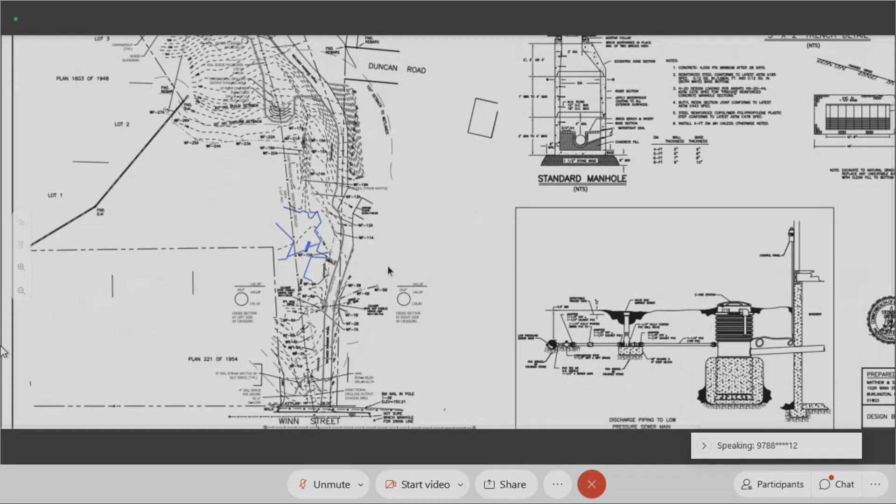As part of that, we did raise the infiltration system a foot. I went back and looked at some test holes we had done for the septic system, and in one corner of that system, there was bedrock. It's not a groundwater issue, but we raised it to have a 2-foot clearance above the bedrock.

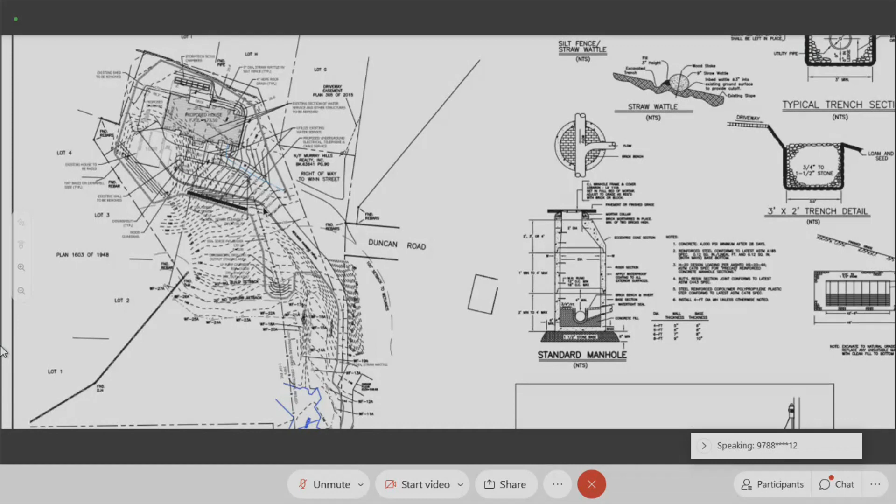We added a drainage trench at the toe of the slope along the driveway. I'm not sure that came up specifically, but it seemed like it was in order once we had the discussion, at one section where there's a pretty good slope coming off the driveway to get a little bit of infiltration. Even though it's far from the wetlands, it still seemed appropriate.

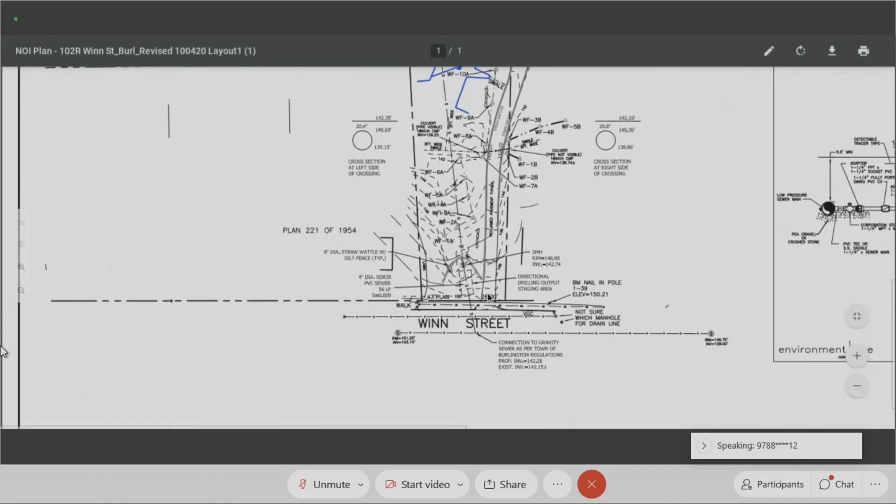We have moved the sewer manhole closer toward Winn Street in order to avoid the 20-foot no disturb zone. The manhole was always going to be outside of it, but they need a little bit of room there, so that was not a big deal.

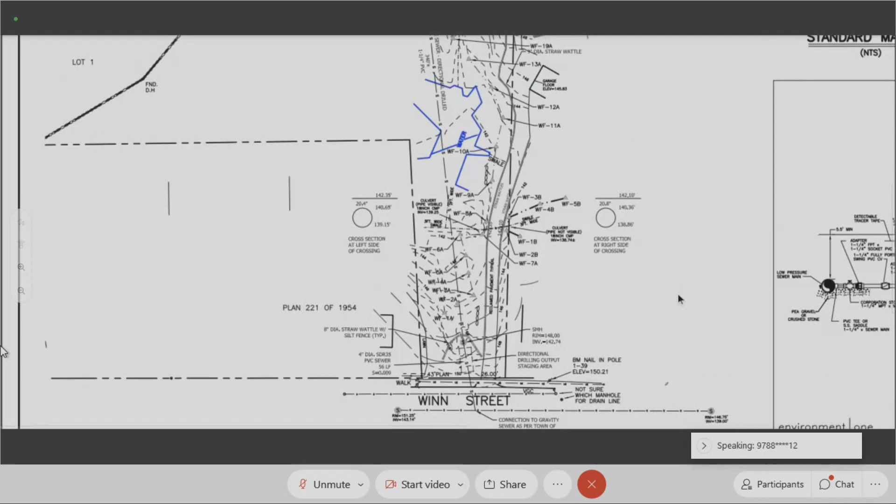We have reduced the slope on the southerly side of the home. It was pointed out there was a pretty significant slope there. As I looked into it, it was a fill, not a cut. So it just seems like to lessen that and either have some foundation exposure or build a knee wall on that side seemed more appropriate than bringing in all that fill.

We have revised the plan to show hay bales at the slopes downhill of the construction, and we provided wattles along the driveway, which were one of the comments.

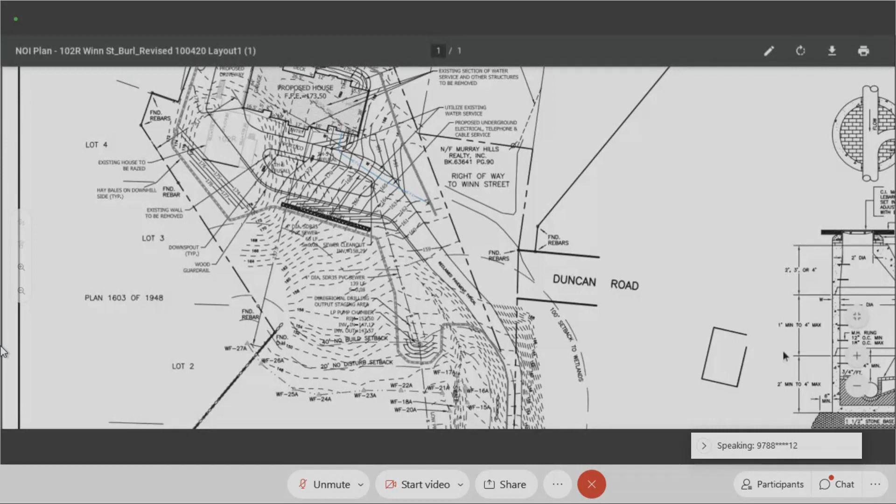One of the outstanding things is we had discussed the crossing of the corrugated metal pipe. I think it will be okay. I did find some charts that say 12 inches of cover would be all that was necessary, and there is a little bit over 20 inches. So I added a cross section on the plan to show that.

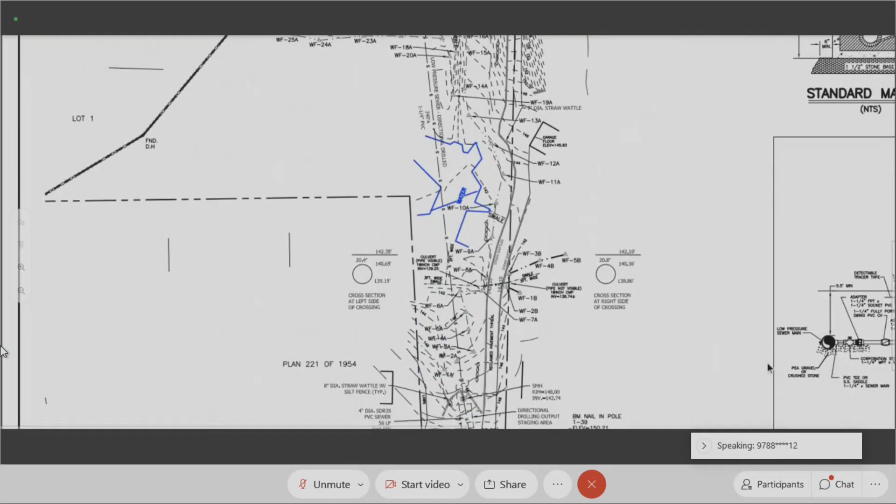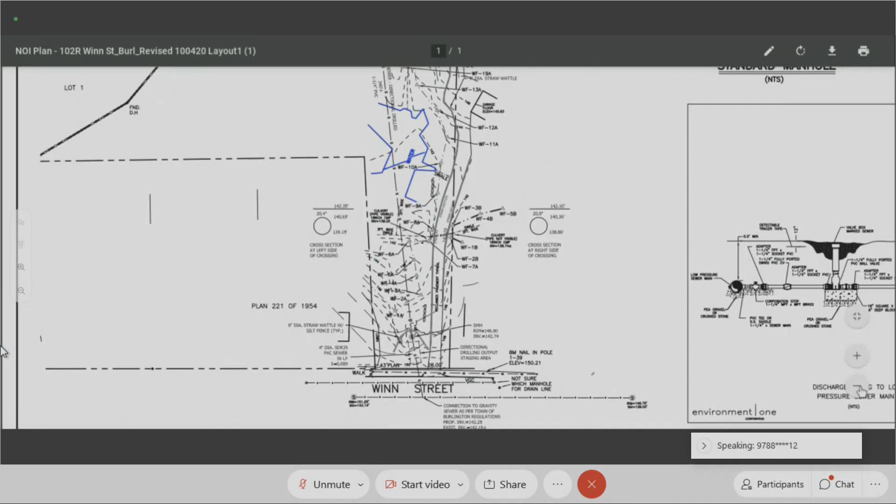Mr. Lee has hired a structural engineer who can provide a letter saying that's okay. And we were asked to reach out to the abutter to see if we could provide access from Duncan Road, but we were unable to make contact with him. We have no problem if the commission would condition that we continue to try, and if we're not able to provide that access, then we need to provide a letter from a structural engineer that we need access from Winn Street. So that's about it.

Any questions? Be glad to answer them. Mr. Lee is here as well.

Okay, very good. Thank you, Mr. Dresser. John or Eileen, do you have some comments? Specifically, do we need anything more from this applicant? And if you have any comments on the changes to the plan.

So I think the applicant provided all the information the commission requested. I don't think we need more information. Just logistically, though, we had prepared a draft for this meeting, and I guess I need to ask Don if he had gotten a chance to watch the last meeting on cable, because we have 3 members out, and I'm not sure we have enough people to vote on this.

So Don, did you get a chance to watch this? That would meet the Mullins rule requirement? Actually, I did not get a chance. Okay. So with 3 members out who were at that meeting, we only have 3 members who were at the last public hearing for this, Larry.

All right, so does that mean by necessity we have to continue it? Unless somebody else shows up. I know Jennifer had an issue that came up, and I knew that Ed did. I didn't know that Indra wasn't going to be here, so, but yes, I think.

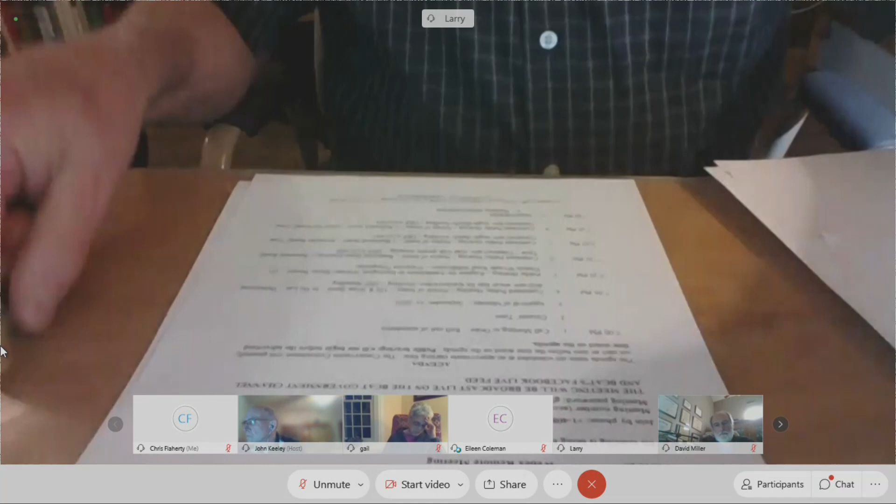When did you send it? I got the script. Is this 108 Muller? No, this is not 108 Muller. This is 101 Francis Wyman.

I do not see it, Eileen. At least, I don't think so. All right. Eileen, you're not on mute. Oh, I am on mute.

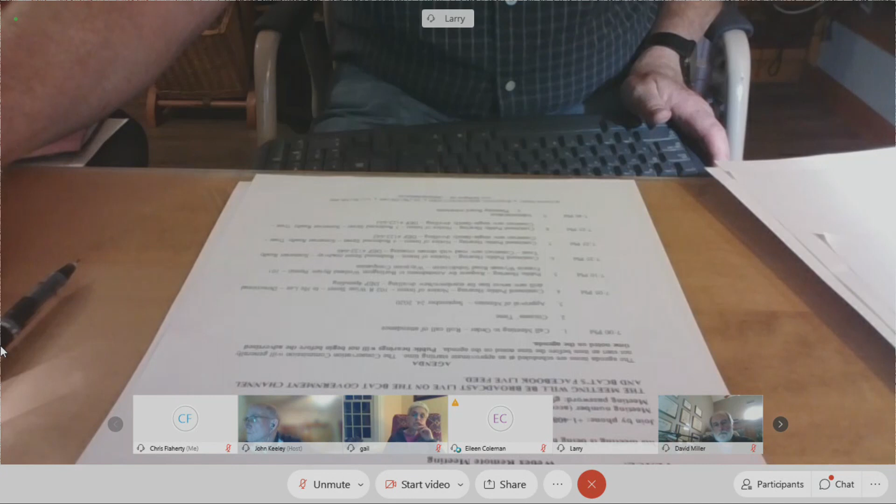Sorry, thank you. I was just saying, John, do you have access to it? Because the Chromebook is being slow, I'm trying to look at my email. Access to it where? I'm at home, so I don't have access to the G drive. All right, so, all right.

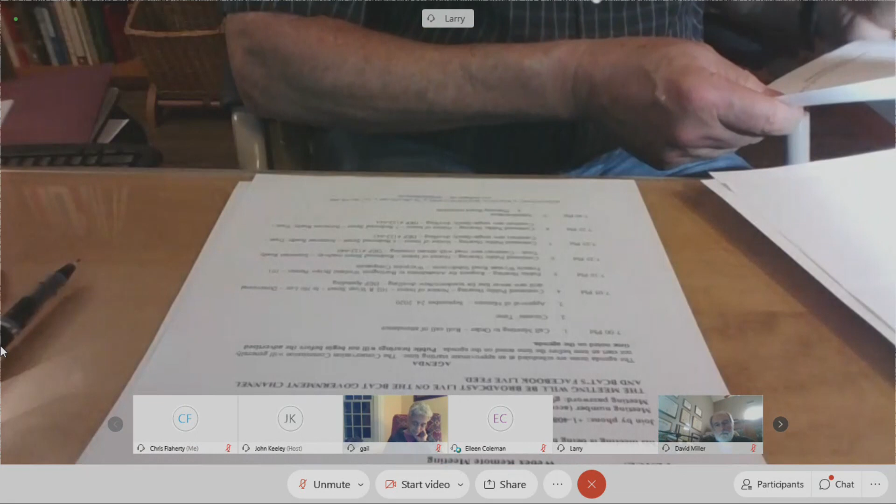Okay, notice is given that the Town of Burlington Conservation Commission will hold an amendment to an existing order of condition for 101 Francis Wyman Road. This was for the construction of a 6-lot residential subdivision with 2 cul-de-sacs located at 101 Francis Wyman Road. We'll take all information related to the amendment and will thereafter decide whether or not to affirmatively issue an amendment to the existing order of conditions.

The original subdivision plan was approved on September 17th. Anyone that has comments they would like to submit in writing can submit them to conservation@burlington.org.

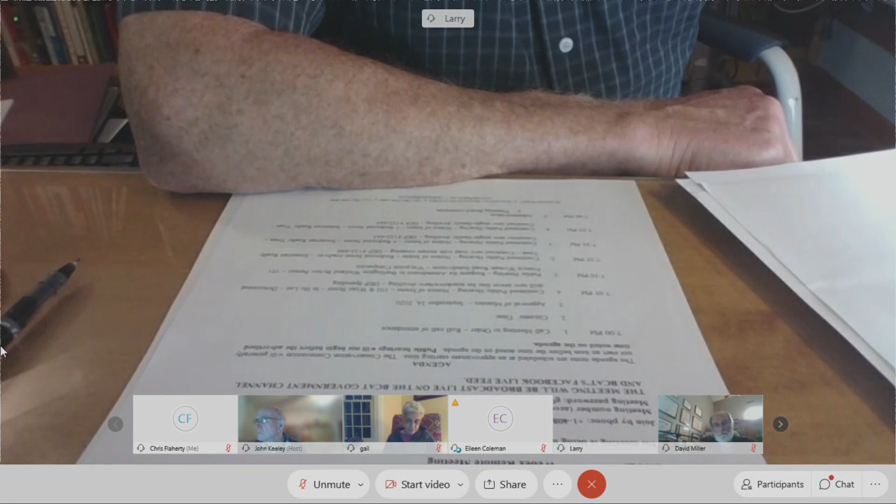All right, so we have officially opened the amendment. Who is here for that agenda item? I am, sir. Ed Champy, Waypoint Development, also the owner of General Walker Estates. All right, so you're welcome to say what you would like to say. The floor is yours, sir.

Okay, just to explain a little bit, this has been going on for some time, and I'll try and give a little background to explain why we're here today. Originally, this was approved prior to us acquiring the property as a cul-de-sac at Dartmouth Road, and then at 101 Francis Wyman, a second cul-de-sac was approved in order to get enough frontage for a two-house subdivision cul-de-sac off of Francis Wyman.

The planning board had suggested that the zoning board of appeals be sought for relief to allow removal of the cul-de-sac, leaving 75 feet of frontage, which is insufficient in that location. The relief was granted, again prior to us acquiring the site. Since then, we've gone back and edited the plan, with Steve Dresser as the engineer, and removed the cul-de-sac itself.

And we went back to the planning board. Not only did we remove the cul-de-sac, but because we removed a significant amount of impervious material, we're able to reduce the size of the stormwater infiltration systems. The original one was taking the cul-de-sac plus the impervious area around the dwellings and infiltrating the stormwater. The current system now only has two driveways.

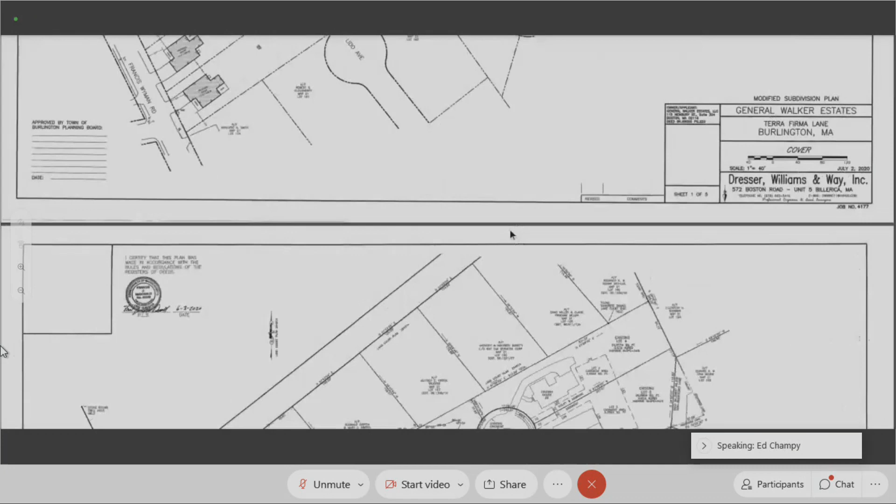There's no longer a cul-de-sac, so it's been removed, and it went back to the planning board. The planning board then requested, originally when it went to the planning board, that the houses were closer to the road than the planning board would have liked, so they asked that we push the houses back. That happened and took place in September, and it was approved by the planning board.

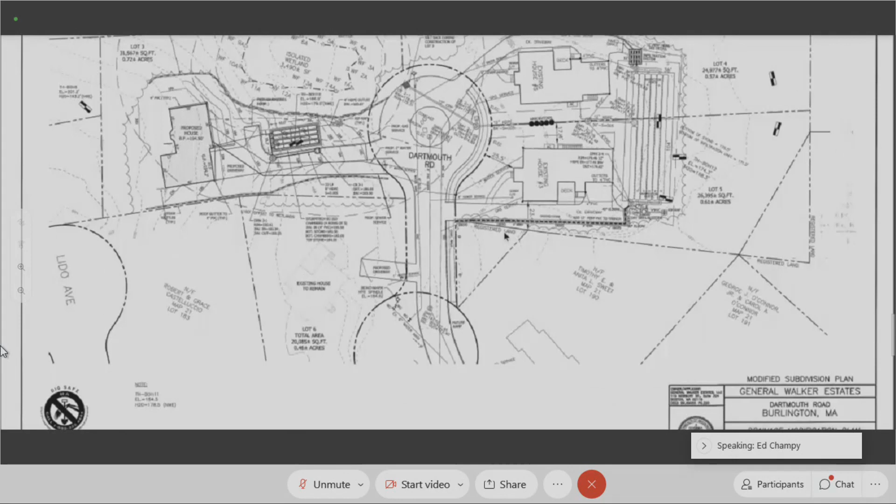So now what we have is two houses with separate driveways to each. In the rear of the houses, there are the stormwater infiltration systems, independent of each other. It's a new plan with less impervious area, and this is the direction that was given based on the ZBA approvals, and now it follows all the requirements.

Okay, Eileen, is this the plan that we're talking about here, that was being shown? You're muted, Eileen. Sorry, okay, yes, I was just trying to show the plan as he was speaking. This is the two homes that are now closer to the frontage than they were before, and each has an individual infiltrator.

All right, so let's, John or Eileen, do you have, or both of you, do you have comments on this amendment? I'm sorry, that's me, I just realized I think I wasn't sharing the plan just there, I was just talking to myself. Do I have comments? I think it's an improvement in that there's actually less impervious area now.

There's less driveway, they're closer to the road, and I think it makes sense to have two separate infiltrators rather than having to deal with figuring out who's going to do the monitoring and management of one between two houses. So I think I have no issue with it, I think it makes sense.

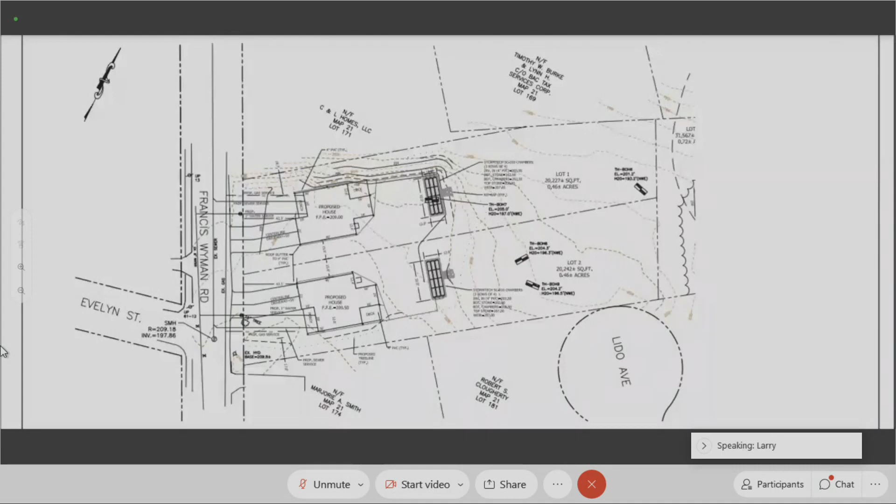Can you see it? Not yet. Whoa, wait a minute, it's coming up. That is the plan. All right.

Okay, so we're talking about the two frontage lots on Francis Wyman. All right. So let's see if there's questions or comments. Gail, do you have any questions or comments?

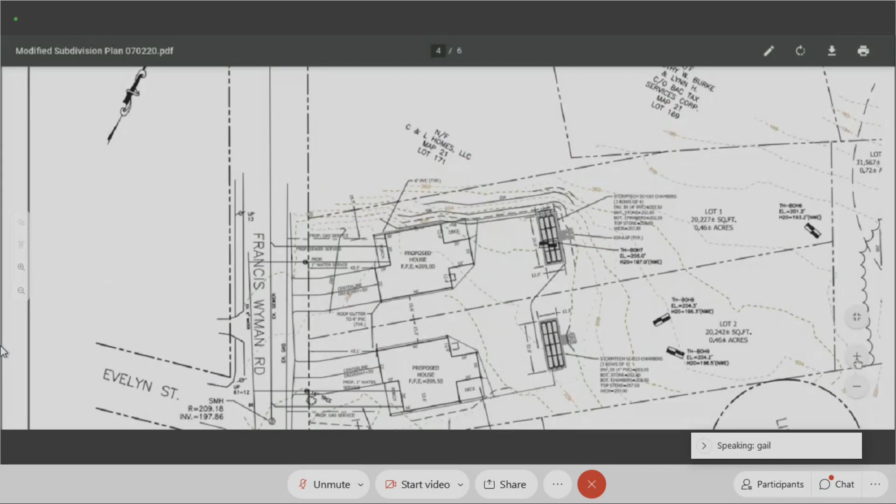No, I can't see the plan that well in terms of the grades and things like that, but based on what was said, there's less impervious area, and having the two separate StormTech chambers seems to be adequate there.

Okay. All right. Dawn, do you have any comments on this one? Not at this time, no. All right, Bill. I think it's an improvement.

My only question is, what is happening to the driveway runoff? It's hard to judge which way it's flowing from the drawing. The infiltrators are only for rooftop.

They are, I can, Steve Dresser was on this call earlier, but he's not here now. I believe, and I'll have to ask Steve, it may fall under the fact that we have less impervious than the original home, and I'm not sure which way the runoff's going. I'd have to ask Steve. But I do know that we have less impervious than the prior.

Okay. Okay. All right. Anything else, Bill? No.

So my question is, from the point of view of the neighbors on each side, will they see this, or should they see this as an improvement?

Mr. Chair, are you addressing that question to me? I think so, because you're the only one here to represent this project. Yes, I apologize, I didn't know if there was a neighbor on the call.

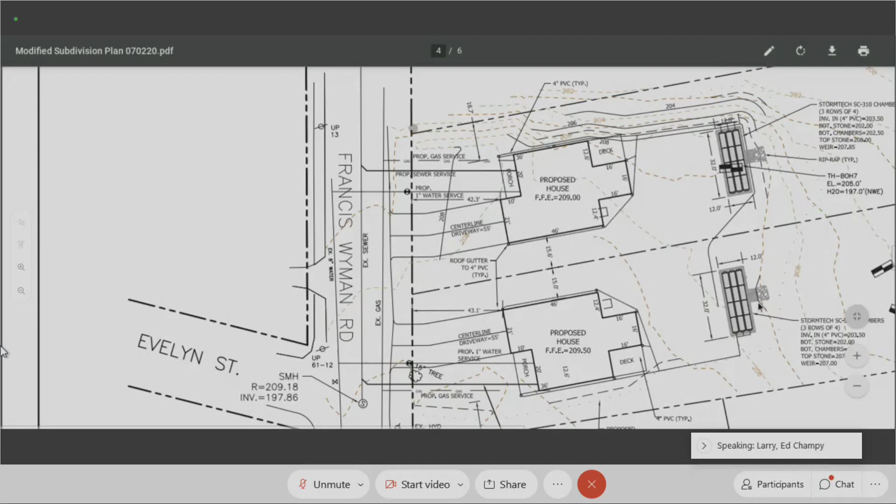Mr. Chair, I apologize for interrupting. I had texted Steve Dresser to find out about the driveways, and he said it's going back to the road. It does that now, so it's okay. It's within the guidelines, so it's going onto the road because it does so now. Correct, there's a large impervious driveway currently in front of the existing structure.

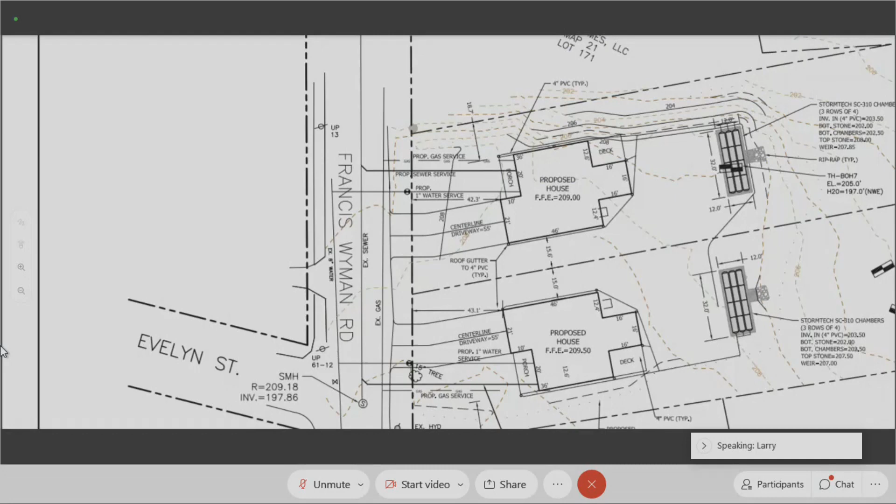John, is that how it's normally handled? That if a driveway discharges into the road with a total tear down, nothing has to be done for mitigation or pitching the crown of the driveway? No, we try to improve the situation. I think there's stone trenches on the edge of the driveways on Dartmouth. I think we'd recommend something like that on these driveways as well.

Okay, so trenches and possibly a swale. And if there's going to be stone trenches, should we have spot grades? I'm wondering, so that you actually get the water going to where the trench is, so whoever does it knows that it's supposed to be pitched that way. Sure. So stone trench, spot grades on the driveway, and possibly a swale, depending on what Mr. Dresser has to say.

Okay, is there anything else? Is there anyone in the audience for 101 Francis Wyman Road who would like to comment on these changes, or on the entire project since it's on the agenda? Nope, I guess the record should show that no one volunteered to make a comment. So because we're doing this by remote participation and the rules provide that we will not close tonight, Mr. Champy, I would anticipate, unless I hear otherwise from our staff, that we would close on October 22nd.

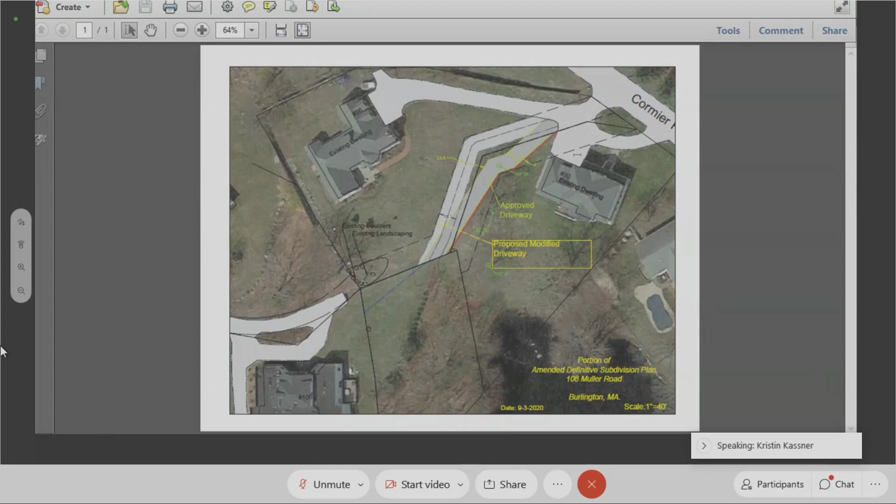Kristin, can I, or can you share the other driveway drawing that we have? Sure, I'll stop sharing. Okay, I'll see if I can just get this on. Well, I'll tell you that I do have a copy of the original plan, and it does say that it is a porous asphalt driveway.

Mr. Chairman? Yes. Neil Russell, 26 Cormier Road. We are the direct abutter to the property. Quick comment, Alan Nelson was here about two weeks ago surveying the property. I believe he intends to provide a new plot plan because the slope is going to be changed, affecting the drainage. I can't comment on that, but I believe an updated plan is supposed to be presented to the Conservation Commission in the near future.

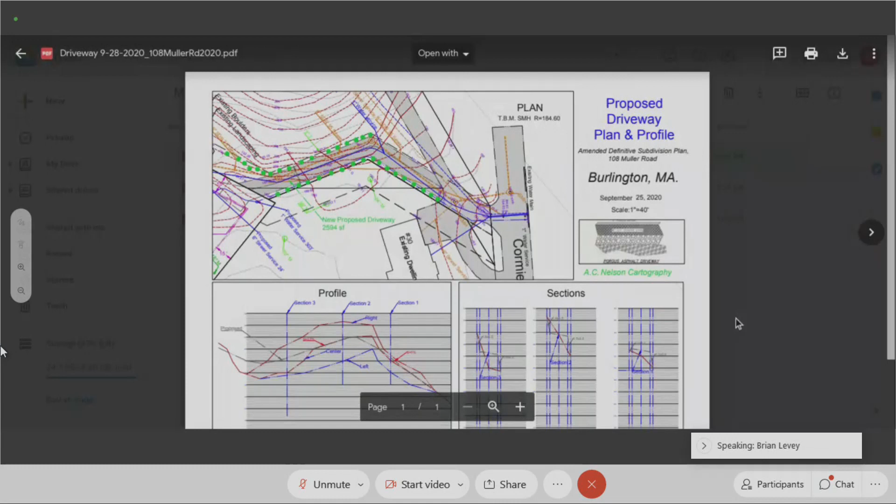Yeah, Mr. Chairman, there's a full package of drainage plans and calculations that have been uploaded to Viewpoint. I can't answer your specific question about whether there is stone along the side of the driveway, but I know I've discussed the drainage with Alan, and he's told me it's more than adequate. But in any event, if we're able to get approval from planning, we will be before you, and we will have to bear our burden of proof before you.

Right, right. This is only comment to the planning board.

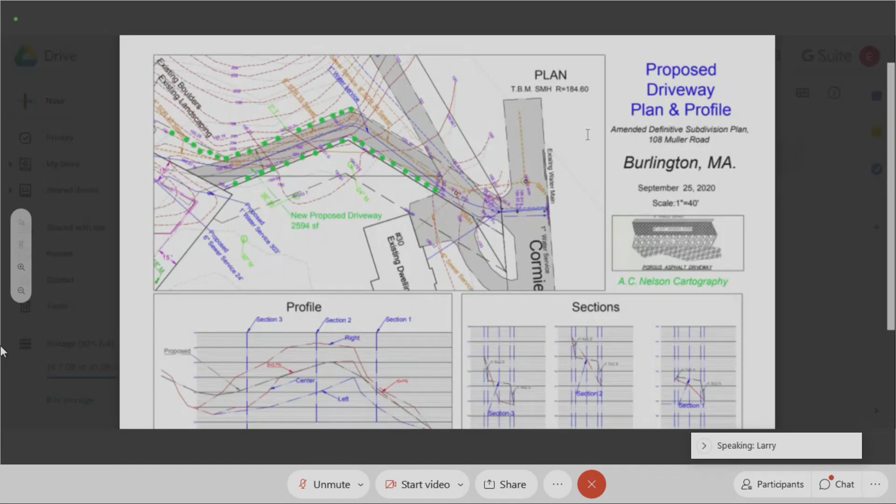Okay, so, all right, so what it looks like, John, is from what I heard, the commission thinks it's an improvement. Is there anyone else, any abutters who want to continue making comments, or anyone here for this before we close this item out?

Yeah, just a quick comment from 26 Cormier, Neil Russell here. We're not looking for anything to be added to this property, trees, walls, anything. We enjoy our view down to the pond, and we are hoping to maintain that going forward.

I suspect that the planning board requested a row of trees to essentially protect your view, sir, of the driveway. I suspect the planning board would take into consideration, tell me if I'm right Kristin, that if you don't mind the view of the driveway and like to continue seeing past it towards the pond, they may consider not requiring trees. Kristin, is that right?

That's correct. The planning board wants to try to minimize the issues that the driveway may cause for the neighbors, so that's where the tree conversation came up. I will say they did request that the driveway grade be explored further, and Al Nelson was out on the site, as the Russells mentioned, to make sure there's no runoff to the neighbors, and any runoff should be mitigated. I think, as mentioned, they're still figuring that out, but the grades were not as much of a concern, at least from the initial data I've received, in terms of needing retaining walls and other things that were mentioned at our last meeting.